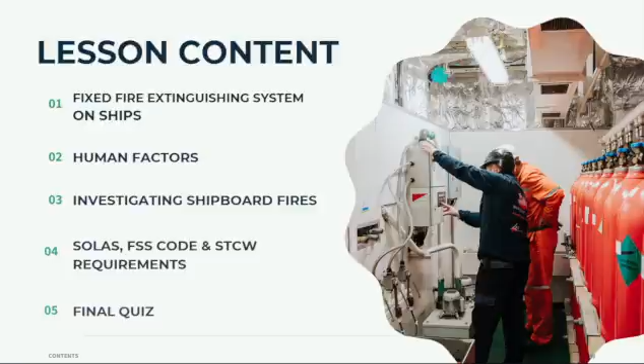So the overview of the fixed fire extinguishing systems on ships, we will discuss about it one by one. Unlike portable fire extinguishers that can be carried out by the crew members, fixed systems are permanently installed on board, and they protect high-risk spaces where manual firefighting may become impossible. Like, for example, engine rooms, cargo holds, pump rooms, machinery spaces, and some galley installations. So all these fixed systems are installed.

Imagine an engine room fire involving a leaking fuel oil. Would you immediately send firefighters inside? Of course, probably not. The temperature may be too high, visibility may be almost zero, and anytime explosions could occur. So instead, the vessel uses this fixed extinguishing system to suppress, control, or extinguish the fire without exposing the firefighters to unnecessary danger.

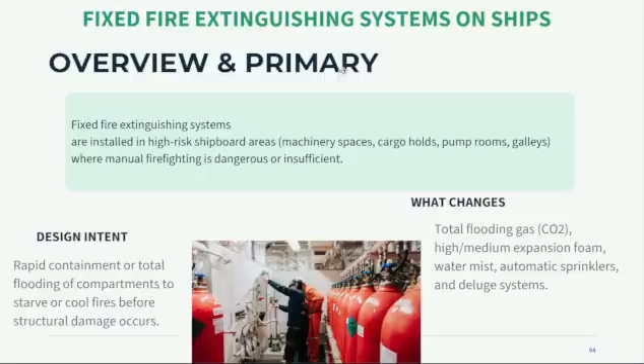So total flooding is one example. This is usually used primarily in machinery spaces, cargo holds and pump rooms. This is probably the most well-known fixed firefighting system on board ships. It works by reducing oxygen inside the compartment. Most fires require oxygen to continue burning, so when oxygen drops below a critical level, combustion stops because you starve the oxygen.

However, this creates another danger. If people remain inside that compartment, they can also be deprived of oxygen. So therefore, CO2 systems save ships, but they can also kill people if procedures are ignored.

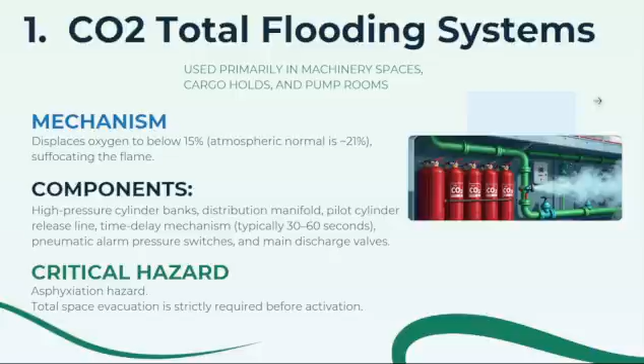So, for the second fixed fire extinguishing system, we have foam fixed installations. Foam is mainly used for liquid fuel fires, the class B fires.

Examples of this are diesel fuel, fuel tanks, lubricating oil, and tanker cargo decks.

This foam forms a blanket over the burning liquid, separating the fuel from the oxygen. Without oxygen, combustion stops. Foam also cools the fuel surface and helps prevent reignition.

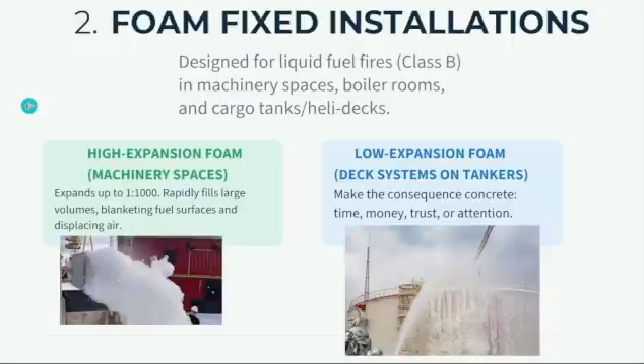Now, with regards to water mist, instead of using large amounts of water, these systems produce extremely fine droplets of water.

These droplets absorb heat very efficiently. When they turn into steam, they remove enormous amounts of heat energy. The steam also reduces oxygen concentration around the flame.

One advantage of water mist is reduced water damage, which is important because excessive water can affect vessel stability. This system is also safer around machinery compared to conventional flooding methods. Many modern ships use water mist mainly because it provides effective fire suppression while minimizing damage to equipment.

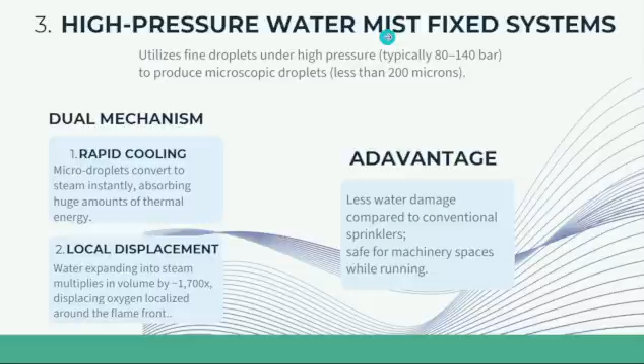That's why the water mist system is mostly used. Now, another system is the sprinkler system, commonly installed in accommodation areas and service spaces. Most accommodation areas on board use automatic sprinkler systems.

There's a common misunderstanding that all sprinkler heads activate simultaneously, but that is incorrect. Only the sprinkler head exposed to sufficient heat opens and activates. Meaning, if a sprinkler is not exposed to heat, it does not open, but the ones exposed to heat have their valves open.

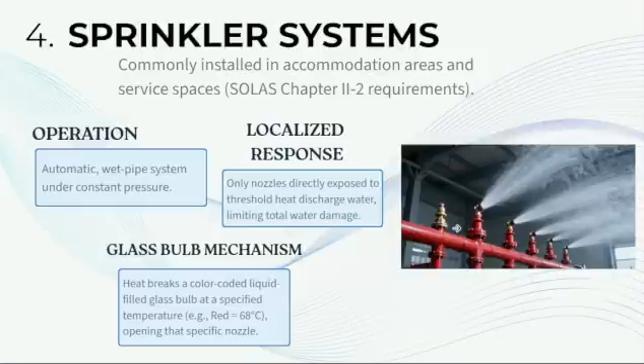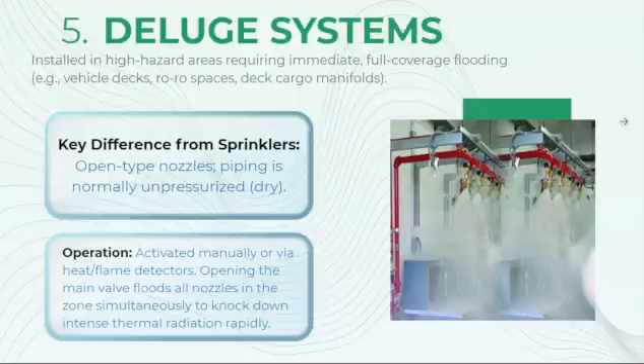In the next section, we will move beyond the equipment and discuss the safety precautions that must always be followed before activating these systems, along with the human errors that influence successful emergency response. Now, here are the safety precautions.

Since we already discussed the 5 fixed firefighting extinguishing systems, we have to understand the different reasons why it is important. So, I will leave a question: Can we activate these systems immediately once we discover the fire? Based on our previous lessons discussion, of course not. We cannot activate these systems once we discover a fire.

Using the correct firefighting system is important, but using it safely is even more important. Before activating any fixed firefighting extinguishing system, especially a carbon dioxide flooding system, the first priority is to protect human life. There are 3 critical precautions every crew member must remember. The first one is 100% head count verification. Never release carbon dioxide into a compartment unless you are absolutely certain that every person has evacuated safely, and you are 100% sure there is no person inside the compartment.

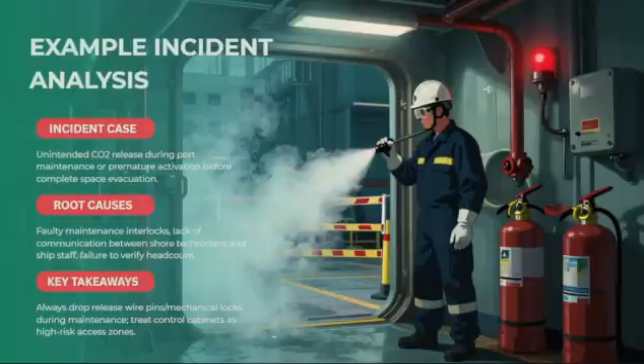So the next topic is human factor in shipboard fire emergencies. Now let me ask everyone a question: what causes more accidents on board - is it equipment failure or human error?

What do you think, everyone? Many investigations show that human error plays a major role in emergency situations - partly correct. The equipment may function perfectly, but if the crew panics, fails to communicate, or makes poor decisions, the situation can quickly become worse. Today we will discuss 5 important human factors: stress in decision making, communication failures, situational awareness, leadership under pressure, and crew coordination and teamwork. Understanding these factors helps us become safer and more effective seafarers during emergencies.

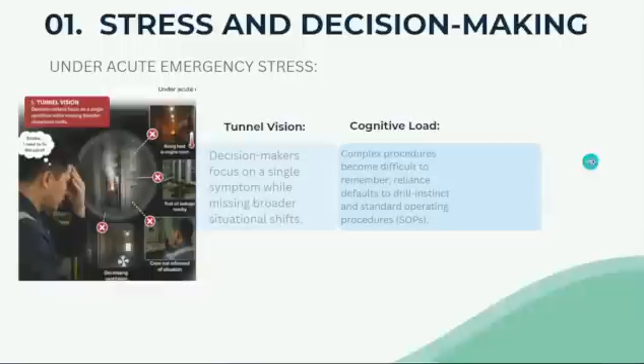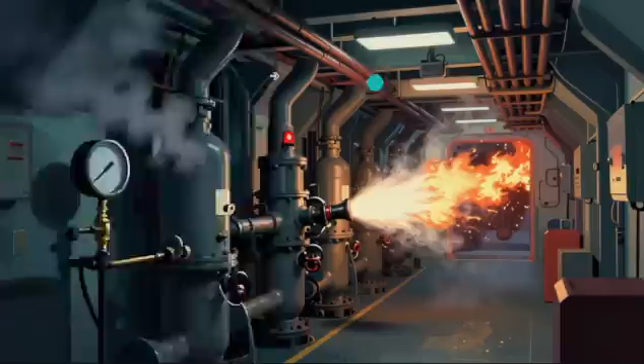So, as mentioned: stress and decision making. Next is communication failure. Then we have situational awareness. And fourth is leadership under pressure. And of course, the last one is crew coordination and teamwork.

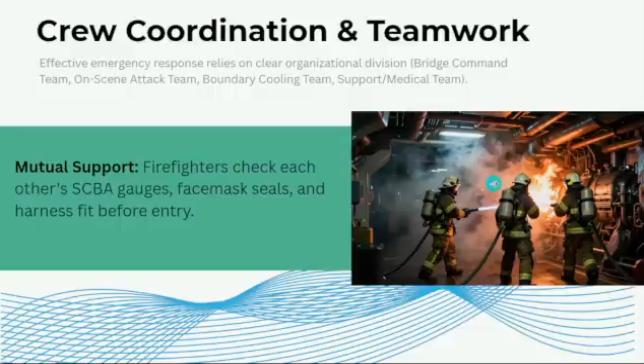Without coordination, there's no teamwork. As we all know, firefighting is never an individual activity - it should always be teamwork. During a shipboard emergency, several teams work together simultaneously. The bridge command team coordinates the overall response, and the attack team are the ones who enter the fire area. Basically, you cannot do it solo in putting out the fire. The safest crew are those who trust each other and work together - that is what we call teamwork.

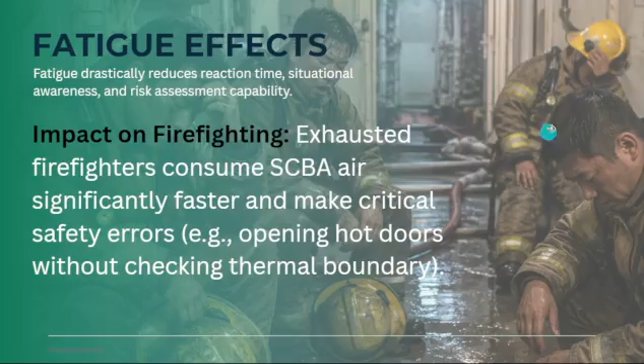Okay, next, the fatigue effects. After the fire, of course, you can feel fatigue. It is often an invisible danger on board. After very long hours of putting out the fire, fatigue drastically sets in. Sometimes decision making is already poor. You cannot make proper decisions because you're already fatigued, already exhausted. That's the basic example or effect after the team effort of putting out the fire.

Now let's go to cultural and language communication. This is actually our final topic in this section: communication among multinational crew. Modern ships often have crew members from different countries. Different accents, different languages, and different expressions can create misunderstandings, especially during emergencies.

The reason why we're having this maritime English lesson is because in order to reduce the risk that the maritime industry may cause further accidents, that's why the SMCP is commonly used during emergencies - our Standard Marine Communication Phrases. As we all know, SMCP provides standardized English phrases and is well understood worldwide.

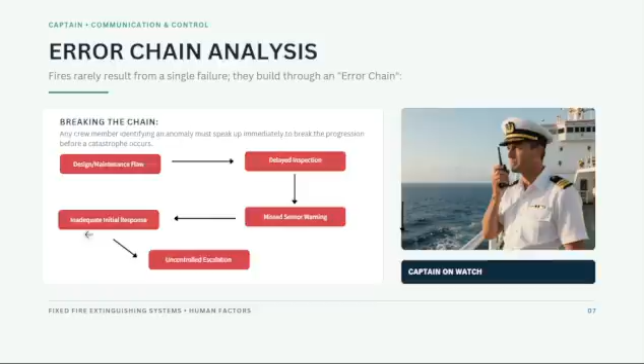Alright, okay, so investigating now the shipboard fires. Once the fire has been extinguished and the emergency is under control, our work is not yet done or finished. The next phase is investigation. Why do we need this? Why do we need to investigate? Is it simply to determine who made a mistake?

Do you think that is the correct question to ask ourselves or to ask anyone? Is it 'who made a mistake'? Is that the first thing that will come to your mind after the fire?

The answer, of course, is no. You will not ask yourself who made the mistake.

No, do not. The purpose of an investigation is to understand exactly how the fire started, how it spread, and how similar incidents can be prevented in the future. That's the best thing to do after putting out the fire.

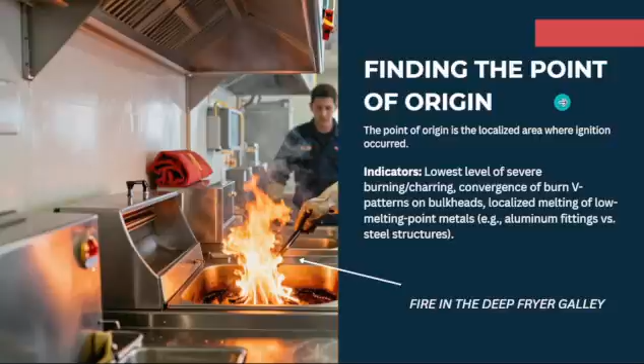So let's start with the purpose of investigation. The primary goal is to know the root cause of this, the root cause and the finding, the point of origin. What is the root cause?

We have to preserve the evidence. Many crew would like to clean the affected area immediately. However, the investigators must first preserve the evidence. Think of the fire like a crime scene area, so the evidence should not be disturbed.

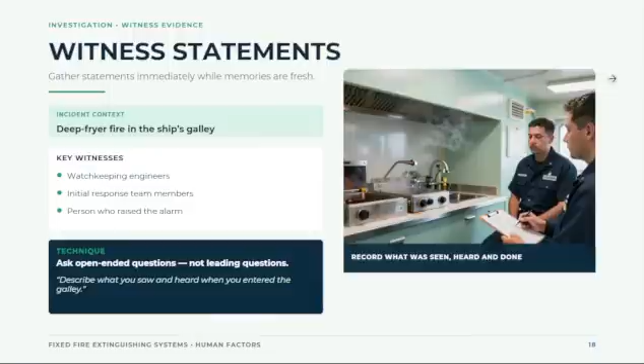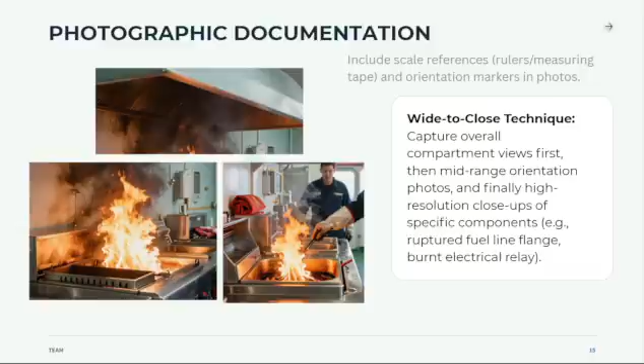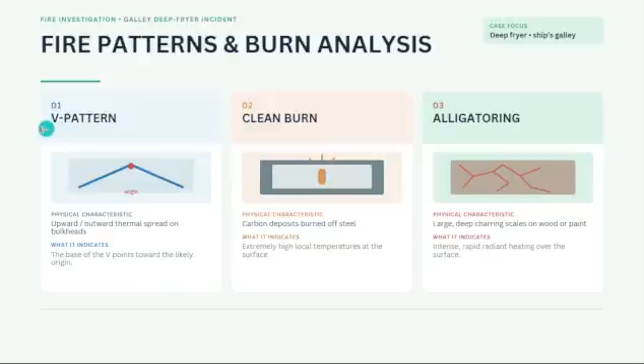And then next is the witness statements, and then we have the photographic documentation. Take photos. And then we have to have fire patterns and burn analysis. This is very important, the V pattern.

And then the reporting requirements. So what are those? You have to report the safety management system reports, the flag state investigation reports, the notification to the vessel's classification society, and of course we have to notify the Protection and Indemnity Club, the P and I.

These reports allow the marine industry to learn from incidents worldwide, and every investigation becomes part of a larger effort to improve international maritime safety. You always have to remember that if lessons are shared, future accidents can be prevented. So let's always remember and put it in our mind that safety is still our priority.

So we have here the SOLAS, the FSS code, and the STCW requirements. This focuses on the international regulations that govern fire safety on board ships. These regulations are not simply recommendations, they are mandatory international standards.

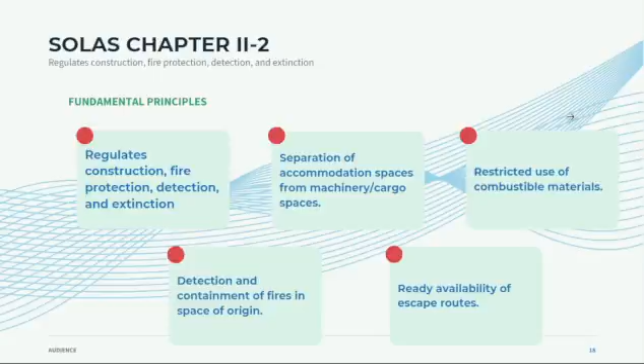And safely. Notice that SOLAS does not simply tell us how to fight fires. Instead, it promotes a complete fire safety strategy, from prevention to emergency response. That is why ships are designed with fire-resistant bulkheads, fire detection systems, escape routes, and fixed fire systems. Everything works together as one integrated safety system. We have to always remember that the best fire is one that never starts.

So we also have the fire safety system, the FSS code. SOLAS tells us what ships must have.

So the FSS code explains how this system should be designed and maintained. And this one establishes international technical standards for fire safety.

Okay, so some important key chapters: we have portable fire extinguishers, we also have fixed fire extinguishing systems, high expansion foam systems, water spraying or water mist, and means of escape.

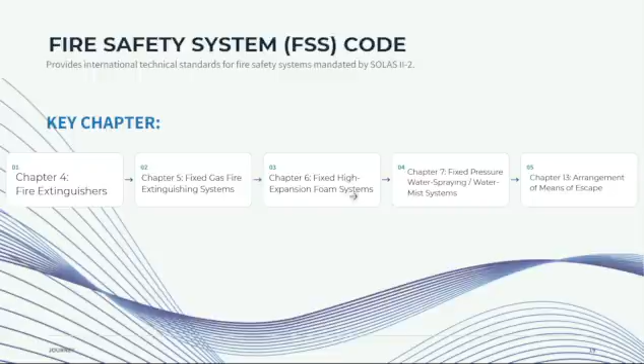That's why regular training and maintenance is so very important with this internationally convention code. So now for the STCW fire competence, well, firefighting equipment alone cannot save lives, right?

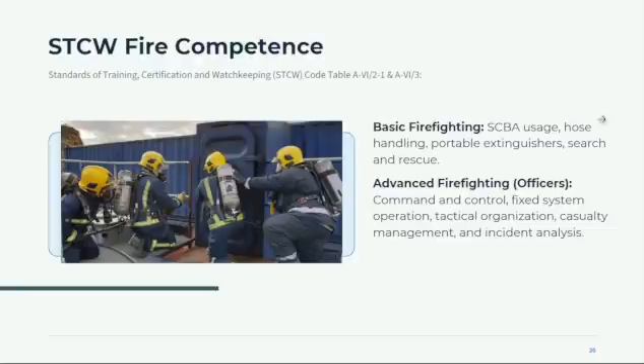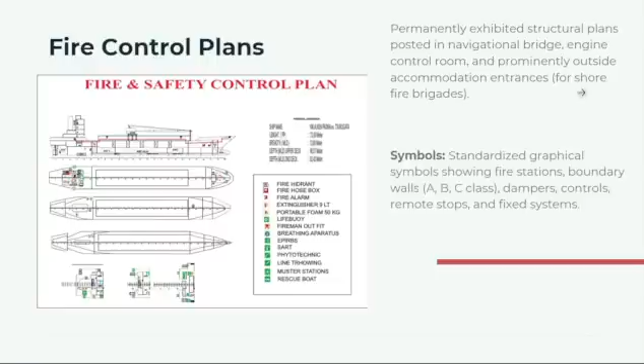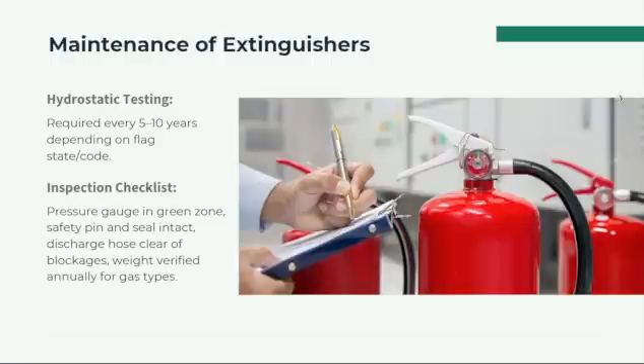So people must know how to use it. That is where STCW comes in, right? And also we have fire control plans, inspection requirements, and the maintenance of fire extinguishers. This is very important, the fire maintenance. And then we also have the port state control deficiencies.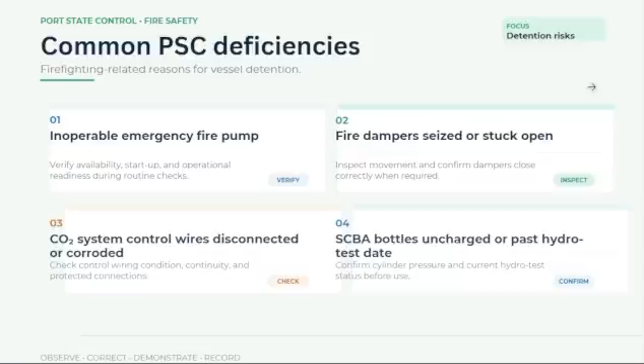Well here, there's no reason for the vessel to be detained. Right? There's really no reason. And we have the fire safety audit review.

This one, the common audit findings. And then that's why our fire investigation after is important. And then we also have the fire safety readiness checklist, we have to have this one. And the emergency fire scenario.

So let's go here. So what do we have to do first? Here for the emergency scenarios, we have the high pressure fuel spray. Okay, one moment. Okay, here, this is the first scenario.

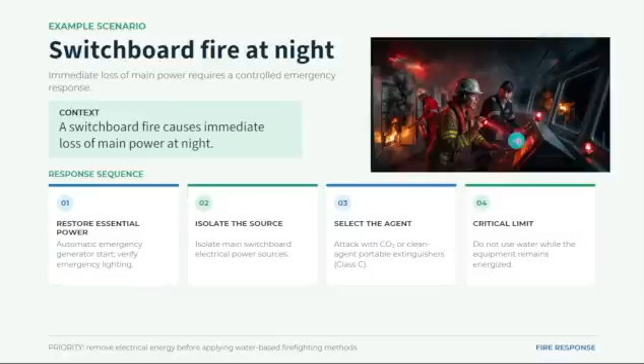So the first one is all about the switchboard fire at night. Look at here, we have a fire in the bridge. And then secondly, we have a high pressure fuel spray fire. So you have to know what actions to be taken.

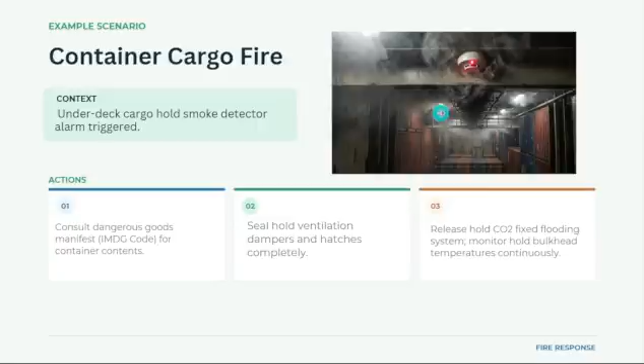So we also have container car fire, cargo fire. And then we have emergency scenario, the galley. Fire during heavy weather. So, what will you do?

And then we have this emergency response sequence. The first thing you will do is to raise the alarm immediately, report the location, and establish the bridge command.

Alright, the second one is the muster and communication. You have to verify the head count, wear your SCBA if necessary, and establish communication channels.

And then the third one is the tactical firefighting. You select the appropriate extinguishing equipment, and then that's the time you attack the fire. You cool the surrounding bulkheads first, and lastly, you isolate the fuel and electrical sources.

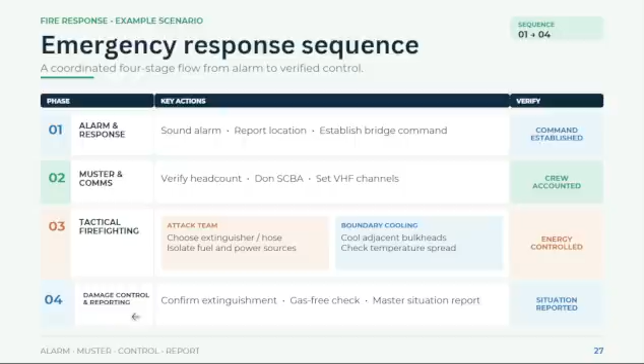And the fourth one, we have here the damage control and reporting. So you have to confirm the fire has been extinguished, and then test the atmosphere before re-entry.

Okay, since we have already completed the main lesson, the next session here now is designed to reinforce what we've learned. So these questions are not intended to catch anyone out. Instead, it helps us review important concepts before returning to work on board.

Just all basics. Now, as we go through each question, don't simply think about the correct answer. Everyone, you just ask yourself why the answer is correct. So understanding the reasoning behind each answer is much more valuable than simply memorizing it. So let's begin, let's review.

Okay, for question number 1: what is the main extinguishing mechanism of a fixed CO2 system? Think about what we have discussed earlier, does CO2 cool the fire, does it interrupt a chemical reaction, or does it reduce the oxygen concentration? What do you think is the correct answer?

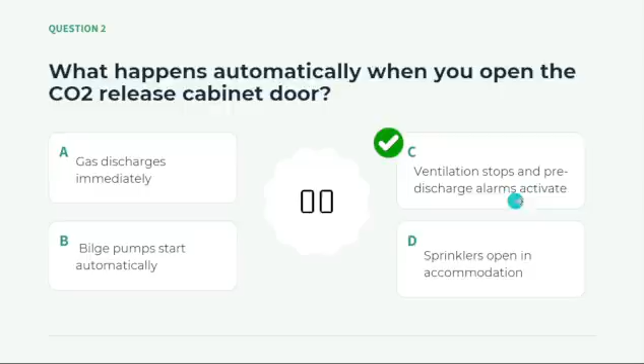So next is, what happens automatically when you open the CO2 release cabinet? Yes, ventilation stops and pre-discharge alarms activate.

Okay, so what is the primary objective of a shipboard fire investigation? It's A, to identify the root cause. Because it's really not easy to claim insurance from the company. So you have to investigate first what is the root cause.

Next is number 4. What does the point of a V pattern on a bulkhead usually indicate? It's the area near the fire's point of origin. Right? That's the point area.

Next, number 5. How does fatigue affect firefighters during an emergency? It reduces reaction time and increases mistakes because you're already tired, already fatigued. So what do you think will happen if you're fatigued during an emergency? It reduces reaction time, you cannot think clearly, you have poor decision making. So there's a big possibility it increases mistakes, right?